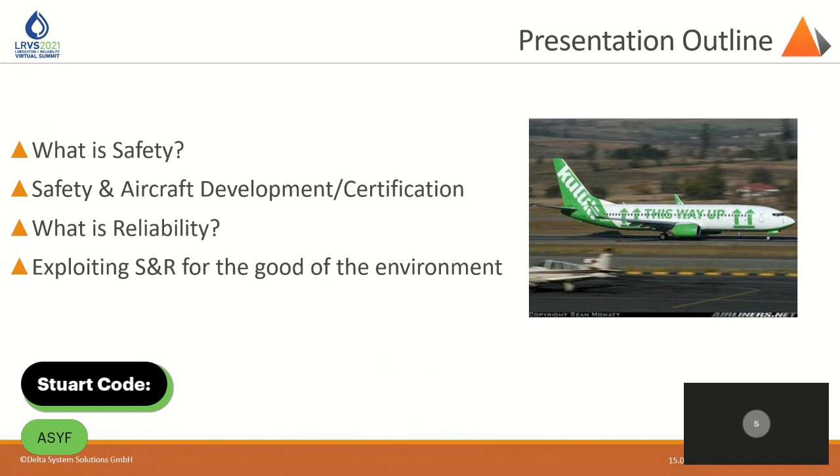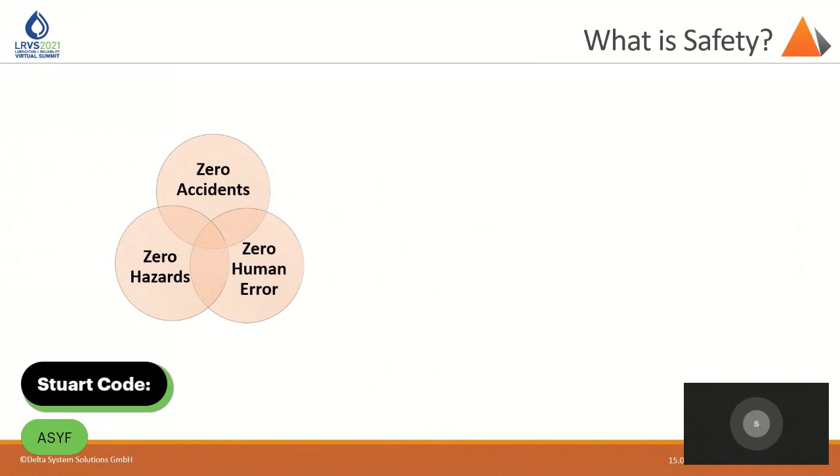So what is safety? The general public's definition might well be that safety means there are no accidents, etc. But in reality and in aerospace, it's recognized that faults and failures will occur, and zero accidents and zero incidents are unachievable. So the focus is on containing any failures or errors before they become an accident.

There are generally two approaches to safety. Firstly, if you're conducting operations at an airport or an airline, for example, then you normally try to implement lines of defense. And the picture you see here is taken from Reason's Swiss cheese model, which is quite a neat way to summarize it. So don't imagine these as a static picture; these slices of cheese are moving, the holes are growing and moving as well.

But you basically have a hazard at one end and an accident at the other. And on a bad day when things are going wrong for you, those holes line up and your hazard turns into an accident. So as an example, a hazard could be at an airport: there's a closed runway for maintenance, so you have to use the second runway, and the accident would be an aircraft mistakenly using the closed runway and crashing into all the construction equipment.

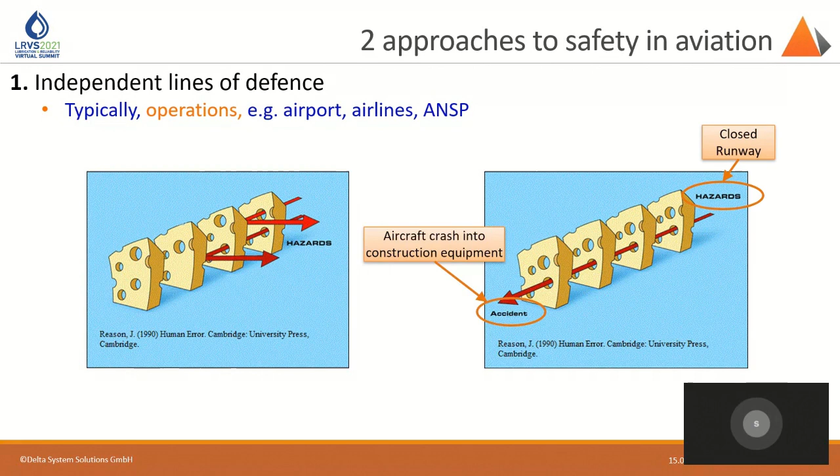The sort of example slices that you can have as lines of defense would be related to the equipment. So equipment on the aircraft, equipment at the airport, signage and markings, things like this. Procedures that you have in place for your organization, training, as well as oversight and independent audits. All these kind of things contribute to the lines of defence.

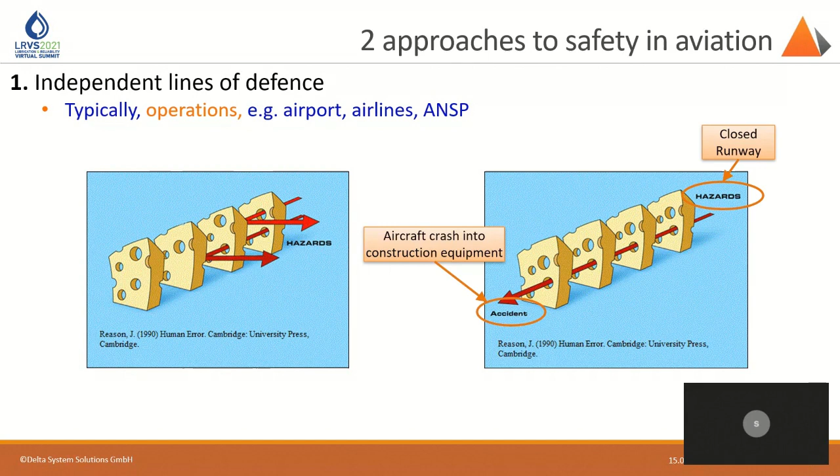And the holes would occur because you have an equipment fault, for example, or there's a procedure that is just inadequate, or your training is insufficient, or the culture is not very good in the organisation. And there's obviously a relatively recent example, a good bad example, with the Boeing Max cases, where the holes obviously did line up, unfortunately.

The second approach, generally speaking, is where you predict the scenarios that could contribute to an accident and their likelihood of occurrence. And this is what would normally take place for an aircraft development. So obviously before it's flown, there's a lot of safety and reliability analysis conducted.

And as an example, you would identify a hazard, say complete loss of thrust of an aircraft. That would be catastrophic, as I'm sure you can imagine, resulting in an accident. And then EASA, who are the certification authority, would give you a requirement that you've got to predict and demonstrate, with for example fault tree analysis here, that the probability of that loss of thrust is below 10 to the minus 9 per flight hour. So you do your analysis and hopefully show that you're okay on that one.

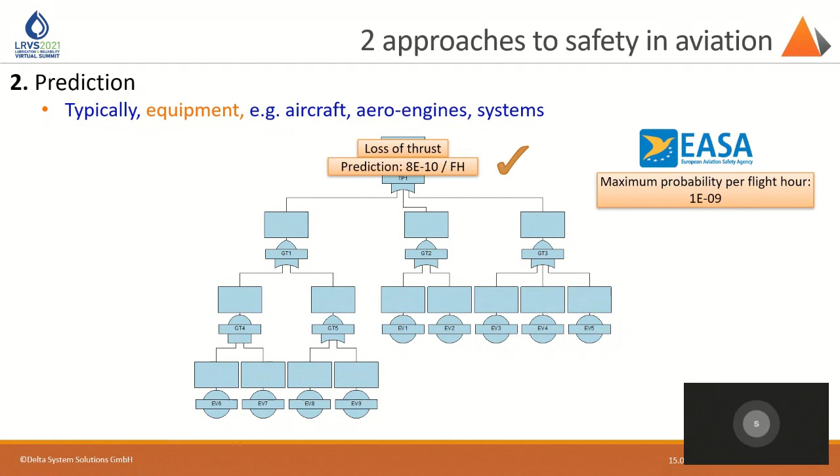The way we conduct it in a development program, the way we would conduct the safety reliability analysis, it can be summarized in a V model concept. So the name comes from the shape of the blue arrows that you see there. And you look at this from left to right is time. So in the top left corner, you've got your start of the project, and at the top right corner, the aircraft is certified and allowed to fly, hopefully.

And top to bottom is the detail of the work of the analysis that you're conducting from a safety and reliability point of view. So at the top level, you have aircraft level analysis, and then you come down through systems and subsystems, items, etc. So at the bottom of that V, software and hardware is being designed and tested, and so the reliability and safety analysis goes right down from the complete aircraft to every single resistor, capacitor, nuts and bolts. It really looks at everything.

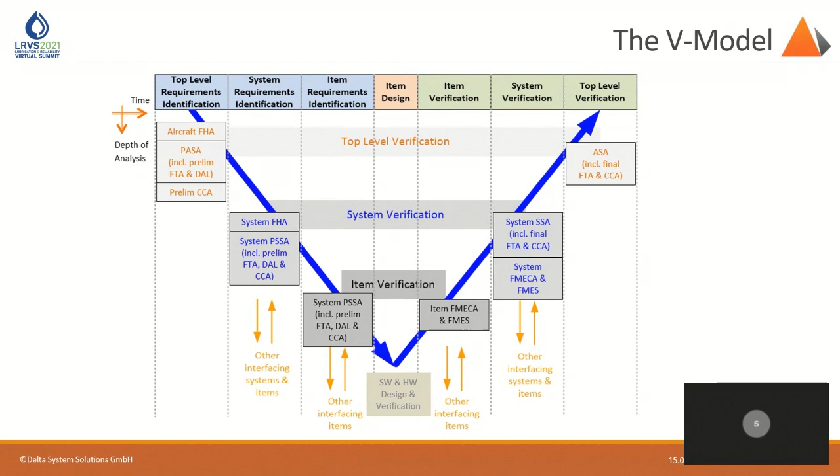Okay, so when should safety start in an aircraft development program? Essentially, it can't start too soon. So what this chart shows you on the left here is that the flexibility of the design, so your ability to make changes, is relatively easy at the beginning. The flexibility is high, which means that the cost is low.

And as you go through your projects and you make architectural decisions, you conduct lots of testing, lots of analysis, and you get towards certifying your aircraft at the end of your project, the design flexibility is very, very low, because you're fixing things. And that essentially means that if the safety analysis is not conducted till near the end, and you identify there needs to be a change in the design, then that change is going to be expensive. So the sooner you start safety, the better.

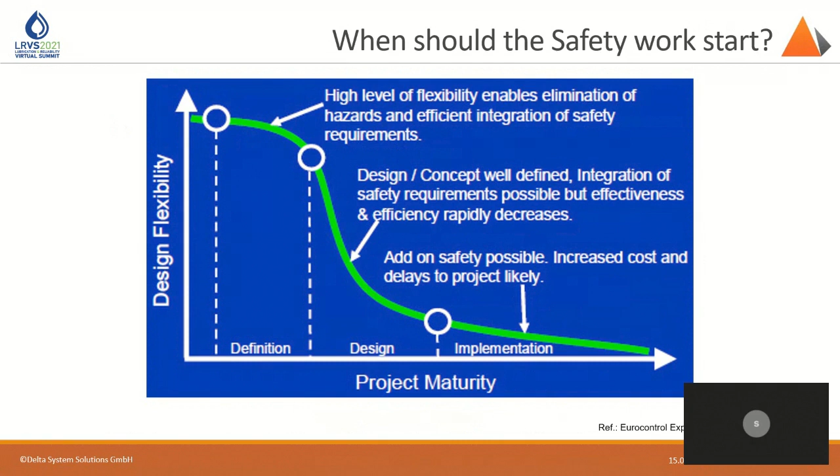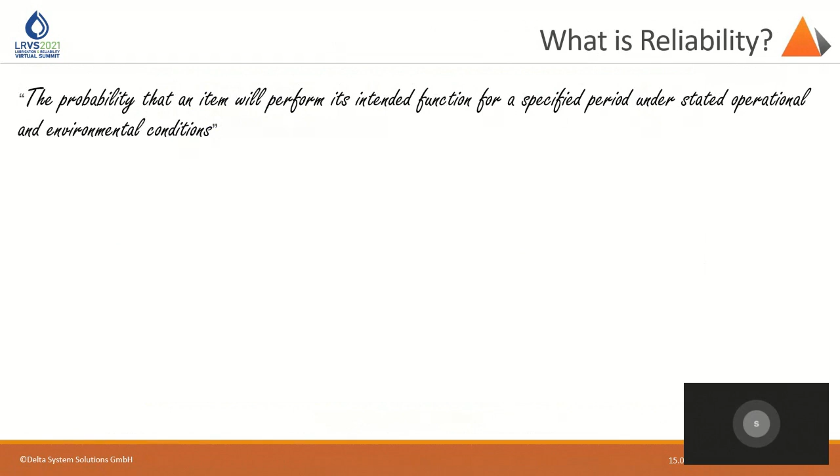So that's safety. What about reliability? So you see there on the slides a really catchy definition that I'm sure you won't remember as soon as I move on to the next slide. But what does that mean in practice? For aerospace, reliability has kind of two areas of focus. One is where you're looking at the equipment. So you're looking at, for example, a resistor. How can it fail? It could fail short circuit, for example. What's the failure rate of that occurring? Or what's the probability of a sensor losing its output? And this sort of information is vital and underpins the safety work.

But also on the operational side, at an aircraft level and a fleet of aircraft level, reliability plays a key role. You want to be able to have your aircraft available for use when you want it, and it needs to fly when you want it to fly. So a lot of reliability analysis goes into availability of the aircraft and the dispatch availability and this kind of thing. Okay.

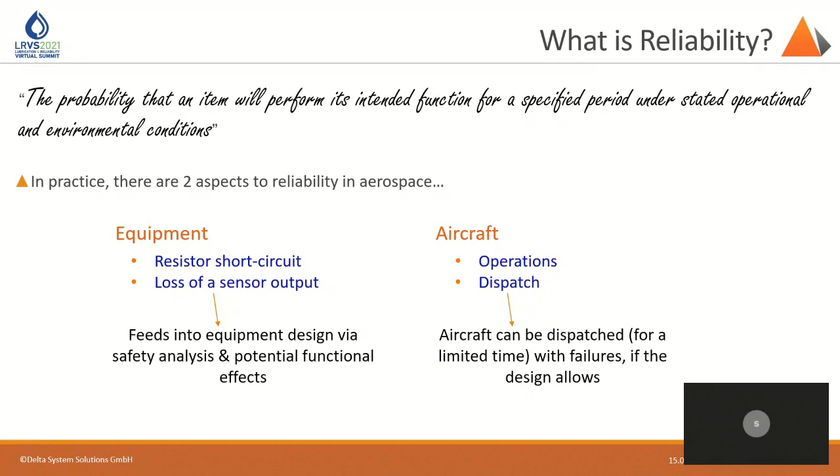So the question is, does reliable automatically mean that you're safe? Safety certainly can be improved if you have high reliability of your equipment. Obviously, if you have fewer failures, you have a lower risk of an unsafe condition. But the reliability can't affect what happens afterwards.

So your resistor fails short circuit, and you could do some analysis, you could do some testing, and make the failure rate of that resistor as low as possible. But what happens in the system and on the aircraft afterwards is not to do with reliability. And if you think back to the earlier slide with the safety definition, it's how to contain these failures. So safety looks at the failure effects as well as the probability of those occurring.

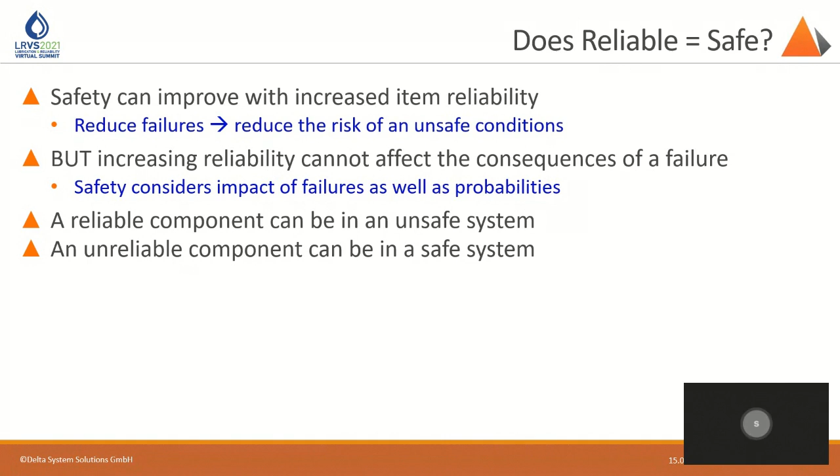And this means that you can have an unsafe system with lots of reliable components. And on the other hand, you can also have a safe system with lots of unreliable components. So you could make a safe aircraft system where you have to change components or equipment after every flight, for example. So in practice, it doesn't work, but in theory, it does. So perhaps to put it in a more succinct way, does reliable mean safe? No, it doesn't.

But as I said, they are linked inherently, and they can be used together in a smart way to help aerospace become more environmentally sustainable. And it can do this particularly with new and innovative technology that is the trend right now that you probably read about in the news anyway, for electrical aircraft, VTOLs, drones, unmanned air vehicles, as well as hybrid and electric propulsion or hydrogen propulsion as well.

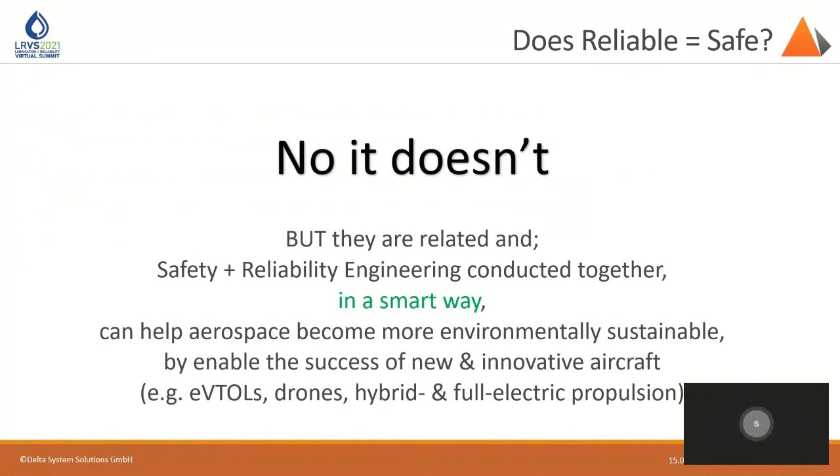So how can we exploit, and when I say exploit, I mean that in the positive sense of the word, we can exploit safety and reliability and all the very well defined and widely used methods and analysis within aerospace. We can use that to the benefit of the environment.

And the first main point and the main driver of the safety and reliability analysis is to prevent accidents. And preventing accidents has the additional benefit, especially for these new aircraft that are under development today, of increasing the chances that this new industry or this new part of the industry will be accepted by the general public.

If you could imagine that if there are some electric unmanned drones delivering around the city in the future, or air taxis running from an airport to a city centre. If in the early days we have some of these dropping onto the city and onto people, and there are real accidents, it won't take many for this new development to be stopped or hindered.

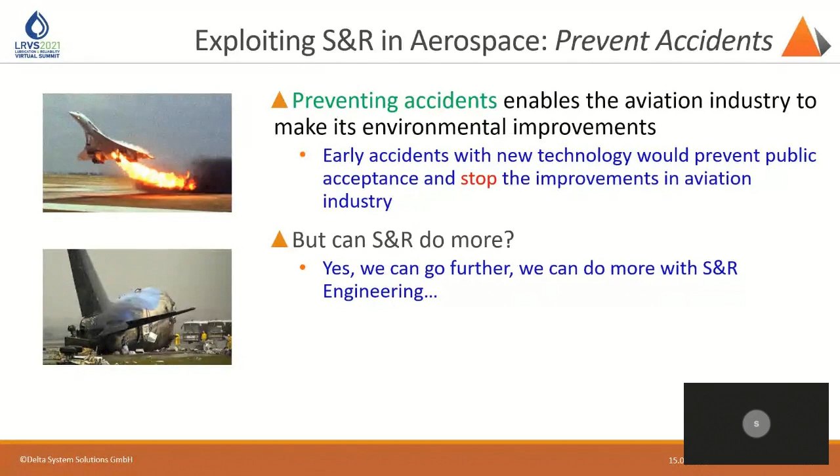Okay, so the next point in how we can exploit safety and reliability. So the first point was what must be done to meet certification, preventing accidents and achieving these very low probabilities of an accident occurring. So everyone does do that. Some do it better than others. But the smart people and the smart companies can and do exploit safety and reliability analysis and engineering further by using it to optimize the design.

So what safety and reliability analysis can show you is, do you need a redundant system? If you do it properly, do you need a redundant system or not? Do you need some redundant equipment? Exactly what do you need in your aircraft to be able to perform what you want it to perform at an acceptably safe and reliable level? So the analysis can be used to show that you have no unnecessary equipment, which means no unnecessary weight.

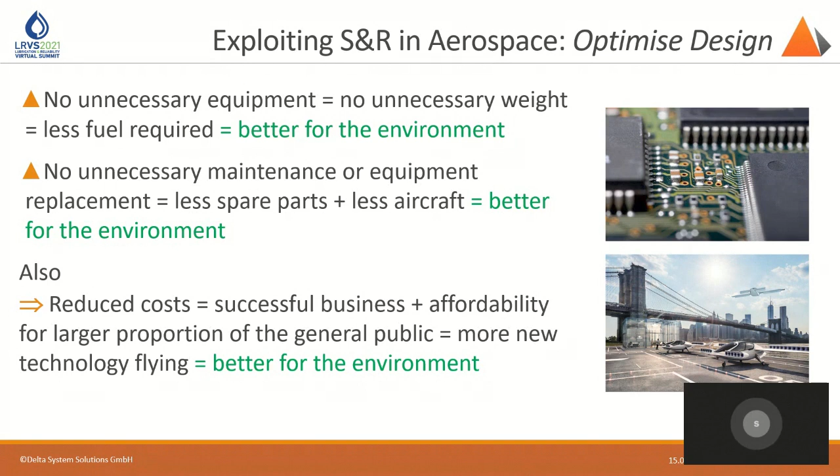Okay, so my final slides. You probably hear this a lot from chief engineers and directors about safety being first. So I just want to take the opportunity to say that safety is the first priority of nobody. So what I mean by this is when you hear it, it's just simply a bit of PR bull.

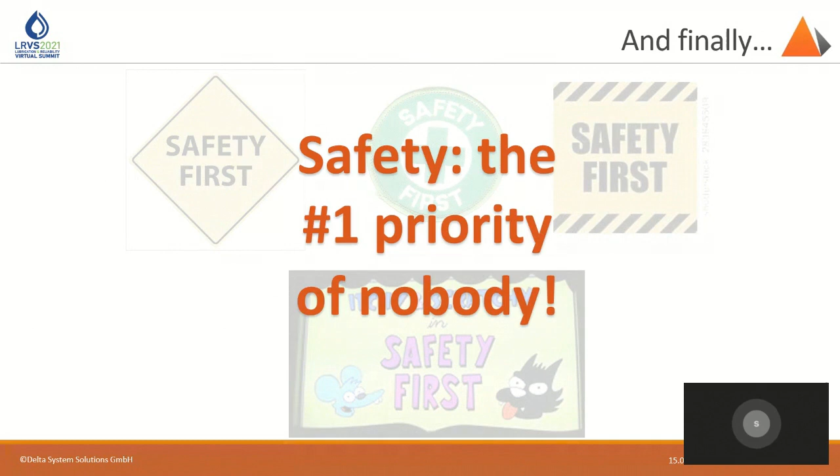If safety was your first priority, where would your aircraft be? I mean, if safety was my first priority, I would never let an aircraft leave the ground. I would never let any people on board or any fuel on board. So it's a load of rubbish, really. Safety has to be considered with other priorities, and it has to be balanced. So you want the business to be successful, and you want it to be safe and reliable. So safety is one of the priorities, but it's a balancing act, and it's not the number one.